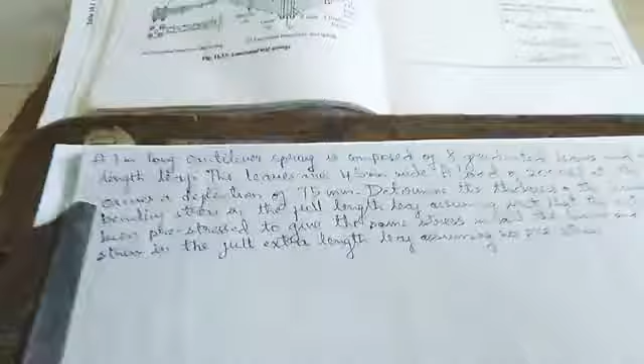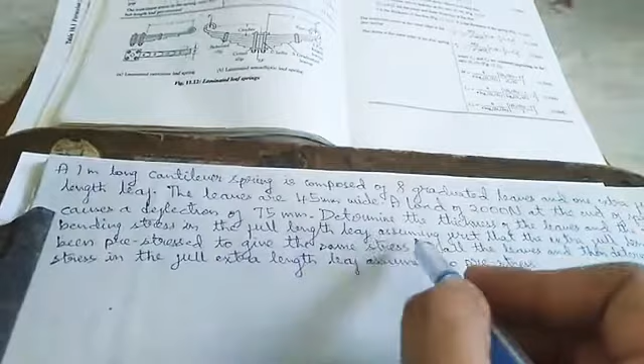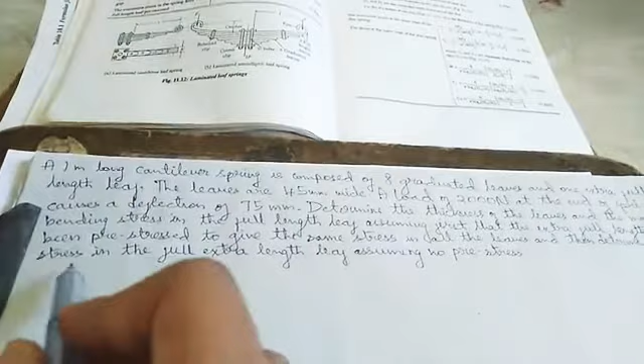A 1 meter long cantilever spring is composed of 8 graduated leaves and 1 extra full leaf length. The leaves are 45 mm wide. A load of 2000 Newton at the end of the spring causes a deflection of 75 mm. Determine the thickness of the leaves and the maximum bending stress in the full length leaf, assuming first that the extra full length has been pre-stressed to give the same stress in all the leaves, and then determine the stress in the full extra length leaf assuming no pre-stress.

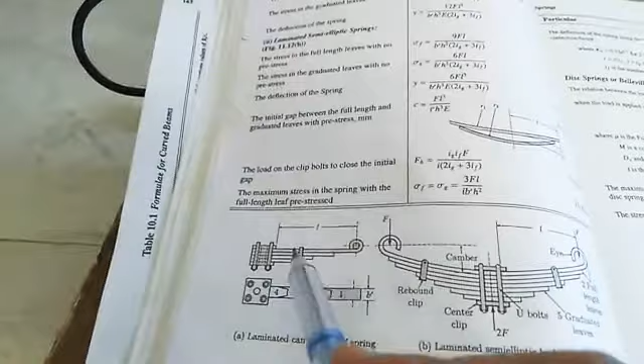So here they have given the cantilever spring. So this is the cantilever spring. They are saying it is composed of 8 graduated leaves and 1 extra full length leaf. So the topmost leaf is called the full length leaf and the remaining leaves are known as graduated leaves.

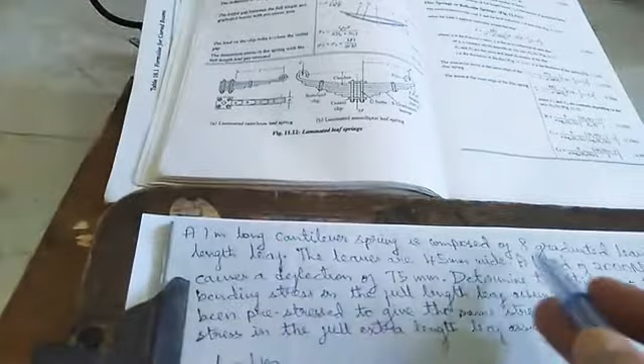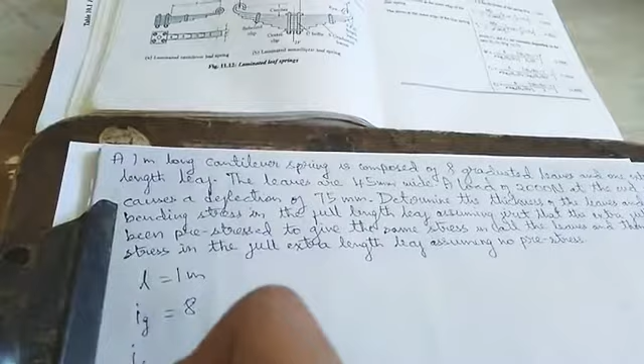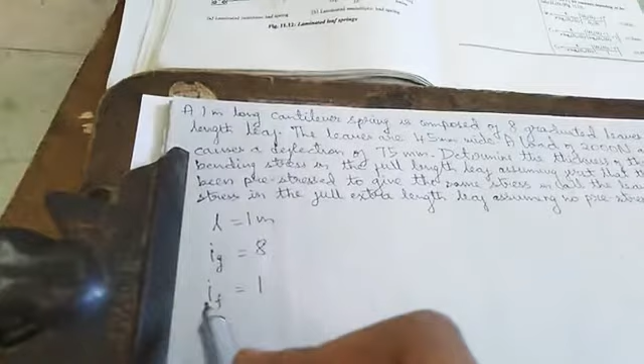So we shall take L is equal to 1 meter, as given 1 meter long. It's composed of 8 graduated leaves, so for graduated leaves we shall call IG. IG is equal to 8, and 1 extra full length leaf, IF is 1. Since they are given specifically 8 graduated leaves and 1 full length leaf, we have to take IG as 8 and IF as 1. So IG plus IF will be the total I.

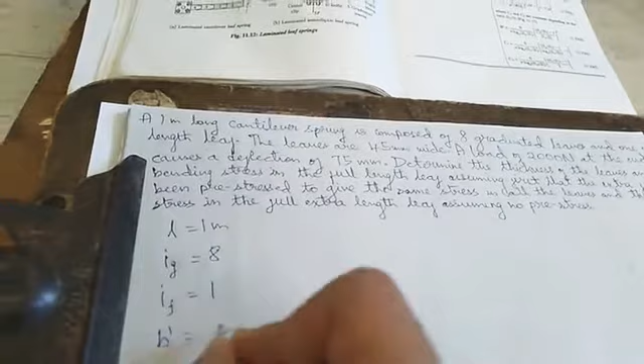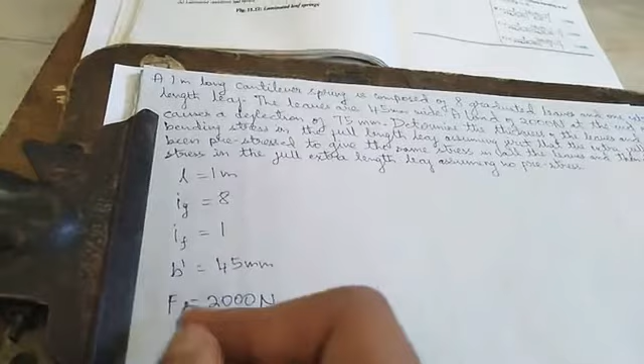The leaves are 45 mm wide, so width is B dash, 45 mm. A load of 2000 Newton, so F is equal to 2000 Newton, at the end of the spring causes a deflection, Y is equal to 75 mm.

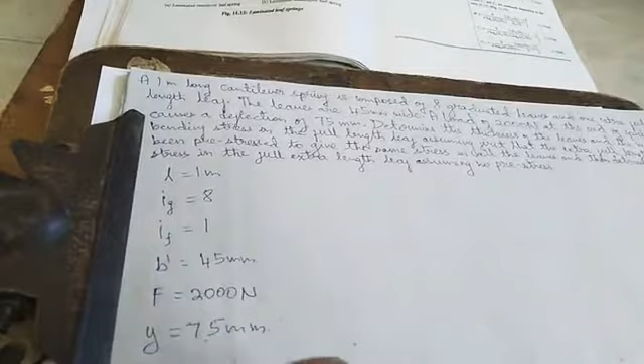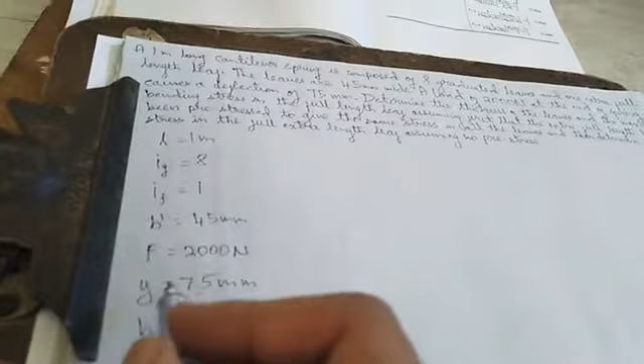Determine the thickness of leaves and maximum bending stress. So they are asking us to determine the thickness H and maximum bending stress. Here they are given two cases.

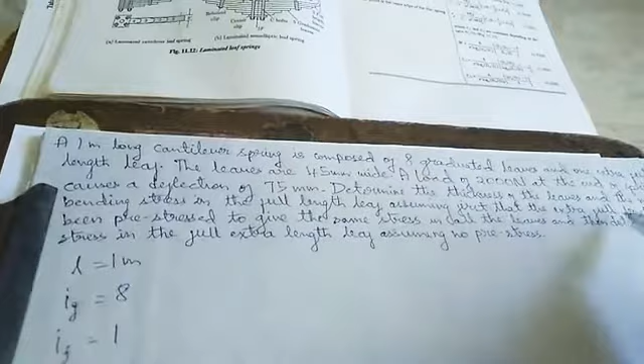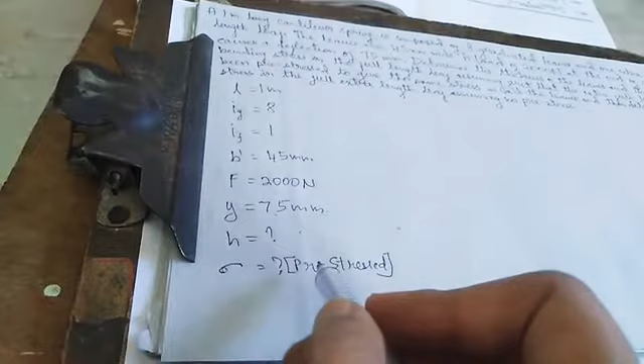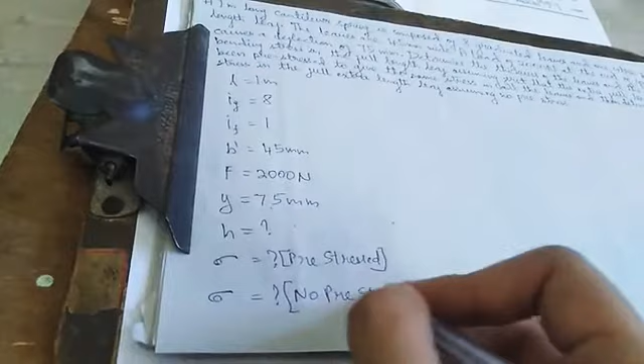Bending stress in full length leaf assuming first that the extra full length has been pre-stressed to give the same stress in all the leaves, and then determine the stress in the full extra length leaf assuming no pre-stress. So the first condition is we have to find the maximum bending stresses when the leaf is pre-stressed. Also we have to find out the bending stress when there is no pre-stress. So these two conditions are given. We shall see how to solve this problem now.

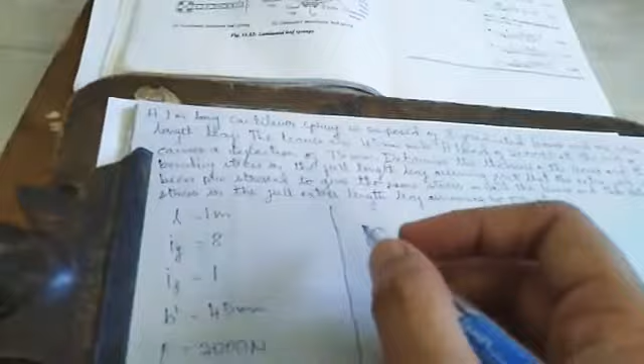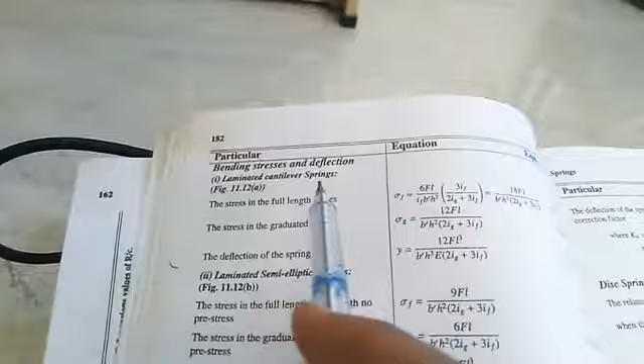First we shall consider the deflection. Data handbook page number 182 gives bending stress and deflection for laminated cantilever spring. Since in the question they are given a 1 m long cantilever spring, we have to consider the laminated cantilever spring from this area.

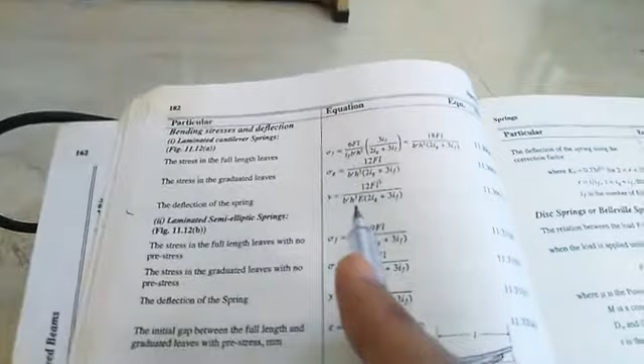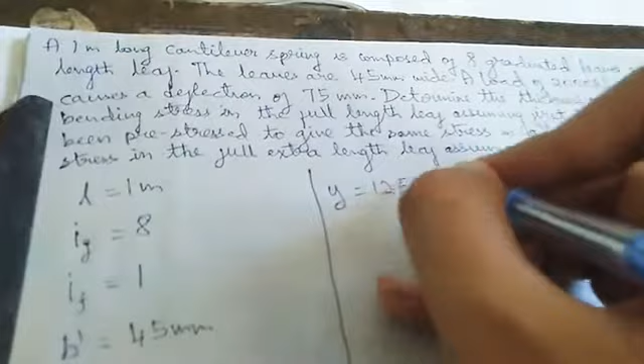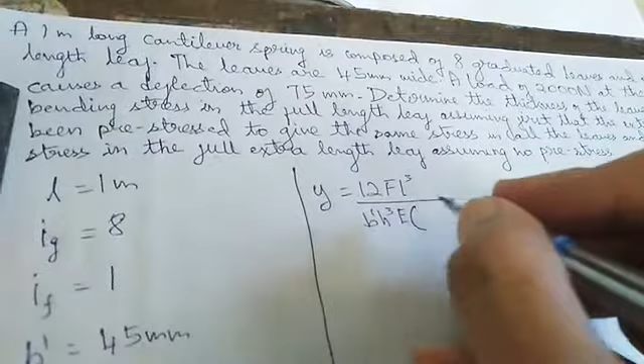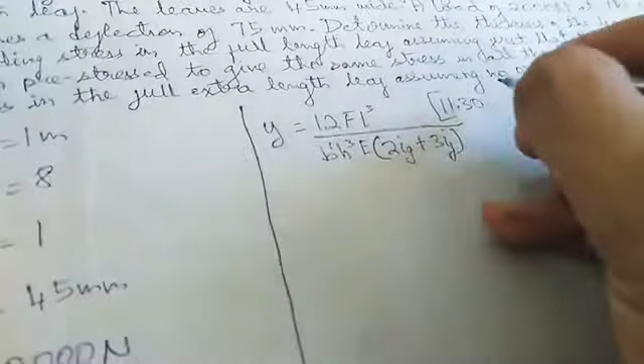We'll consider the deflection first. Deflection Y is equal to 12 FL cube, equation 11.30C, page number 182. Y is equal to 12 FL cube by B dash H cube E, 2IG plus 3IF, equation 11.30C, page number 182.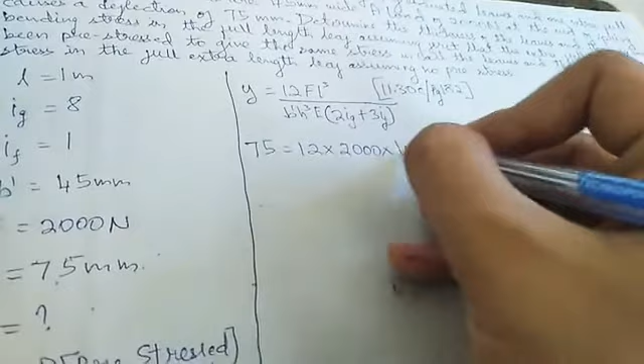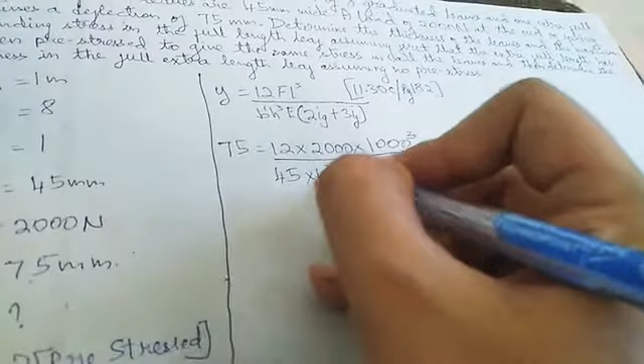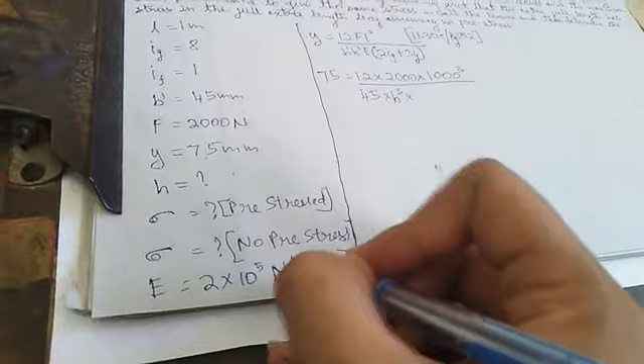In the question they are given the deflection as 75 mm, F as 2000 Newton, L as 1 meter or 1000 mm, B dash as 45. H cube we have to find out, and E is not given, so we shall assume E as 2 into 10 power 5 Newton per mm square, or 200 GPa. Since it's not given in the question, we shall assume this.

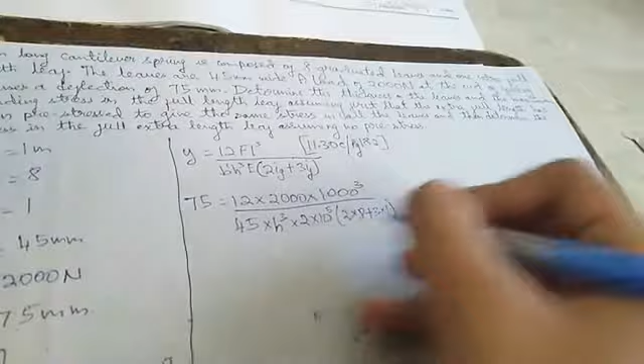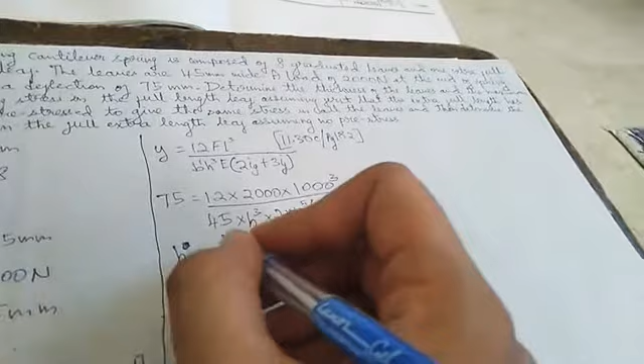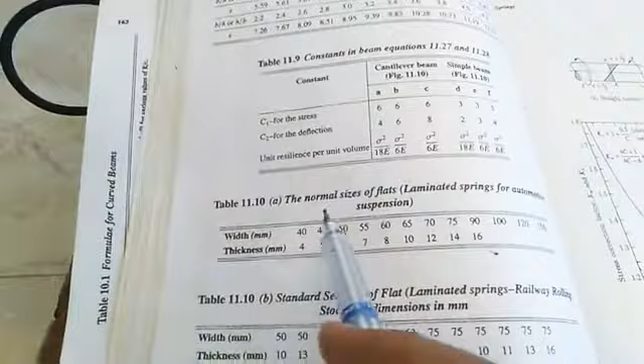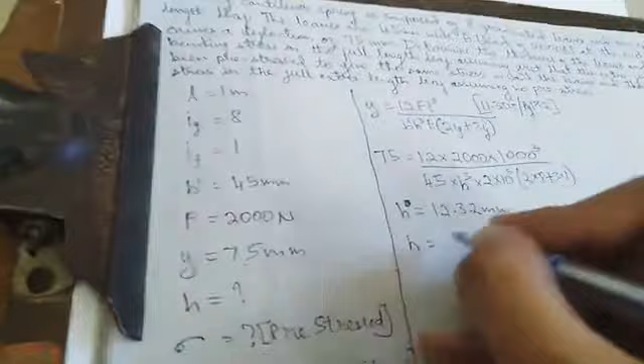From page number 198, table 11.10a, the normal size of flats. So for thickness, here they are given the standard size. In the problem we have got 12.32 mm, so we shall consider the next higher value, 14 mm, as the thickness, from table 11.10a, page number 198.

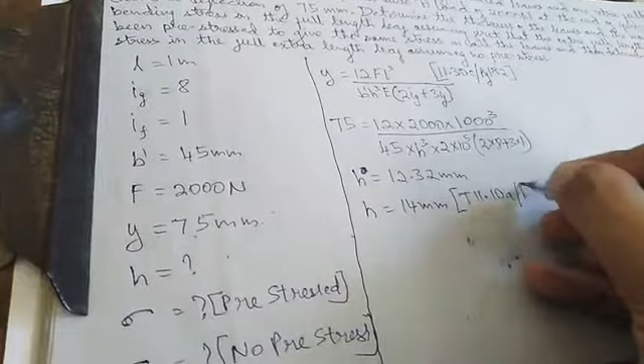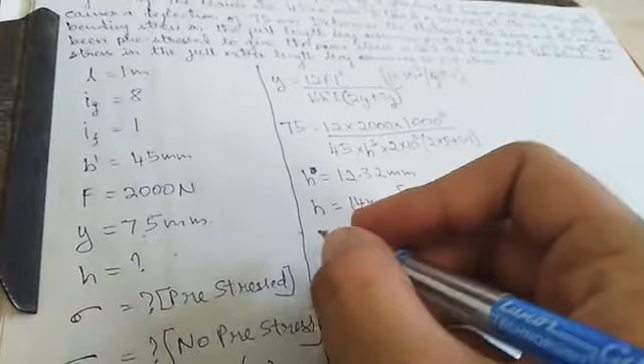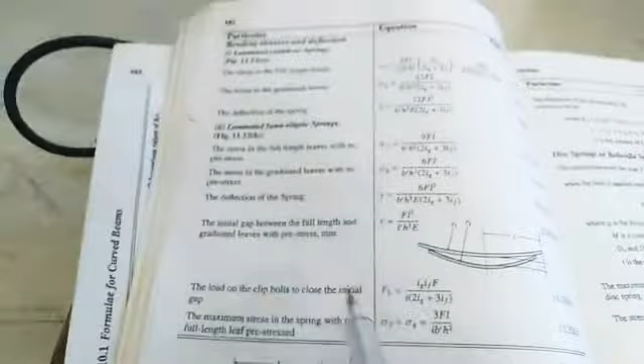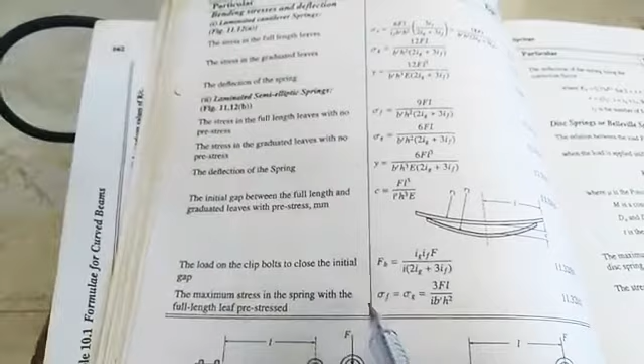Next we will find the stress in the full length leaf when the leaf is pre-stressed. We shall take this from the data handbook, page number 182. Here they have given the condition for maximum stress in the spring with the full length leaf pre-stressed. So if it is pre-stressed, the stress sigma F is equal to sigma G, that is, stress in the full length leaf spring is equal to the stress in the graduated leaf springs.

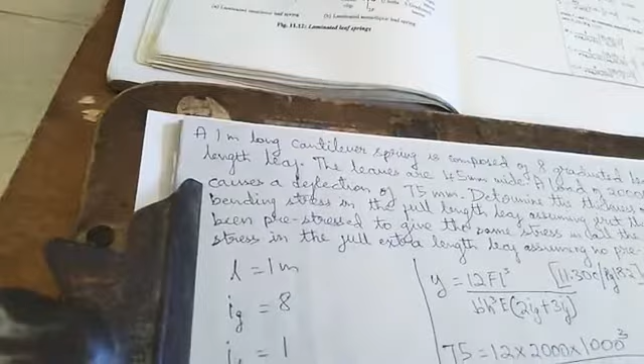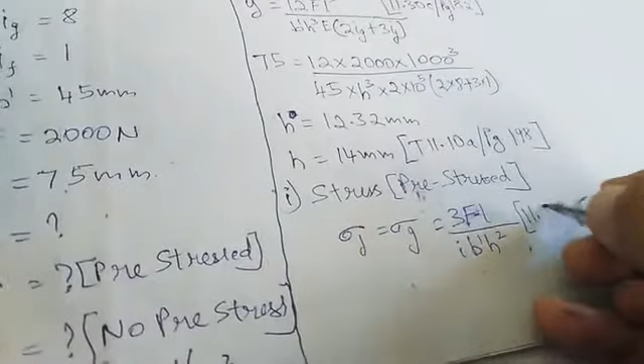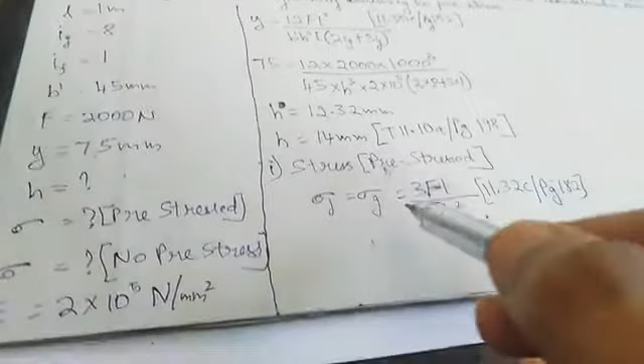So sigma F is equal to sigma G is equal to 3FL by I B dash H square, equation 11.32C, page number 182. We shall consider this equation: sigma F is equal to sigma G is equal to 3FL by IB dash H square.

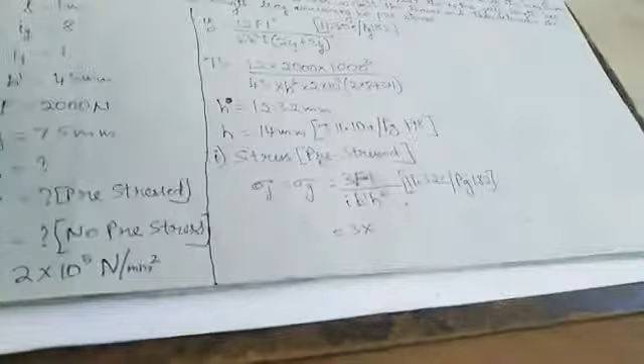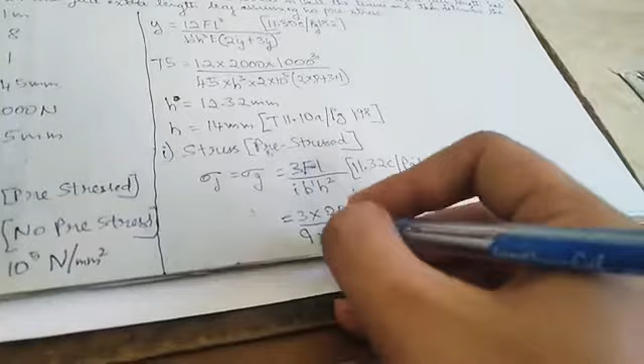So when the condition is pre-stressed, they have given 3 into F, 2000, into L, 1 meter or 1000 mm. I becomes 9 because we have added the graduated and full length leaf springs. B dash is 45 and H is 14 square. So the stress becomes 75.59.

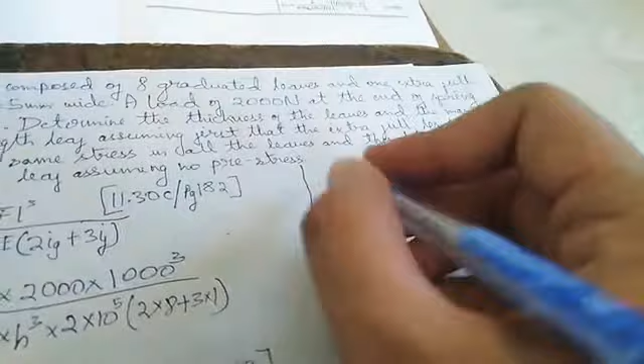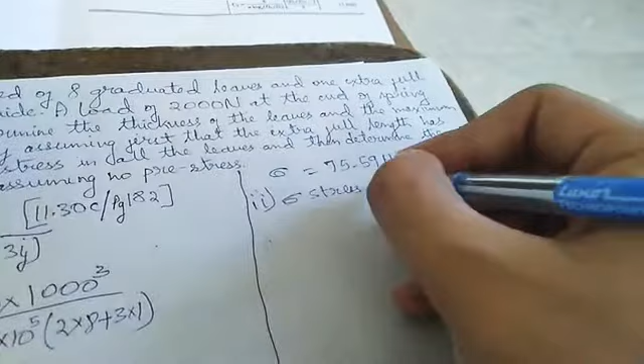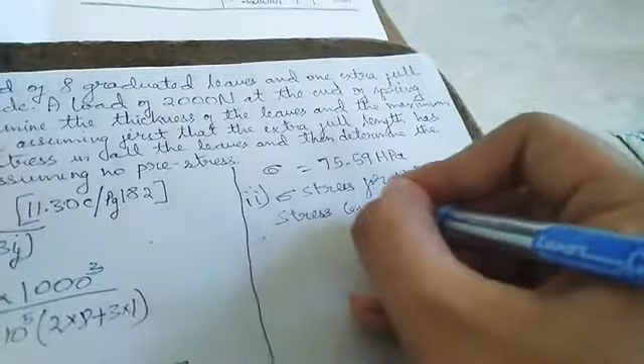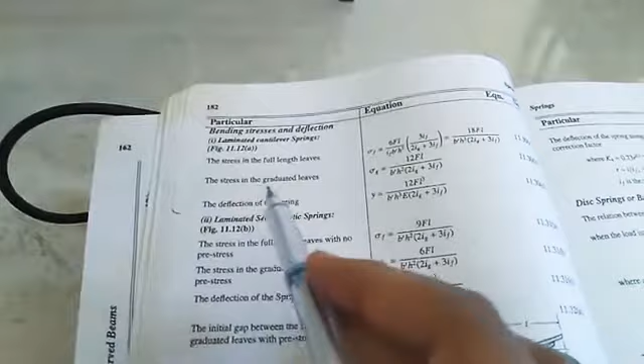So this is the stress when the leaf springs are pre-stressed. Now we shall find out the stress for the not pre-stress condition. From the data handbook, laminated cantilever springs, the stress in full length leaves and the stress in graduated leaves. We shall consider the stress in full length leaves, sigma F is equal to 18FL by B dash H square into 2IG plus 3IF.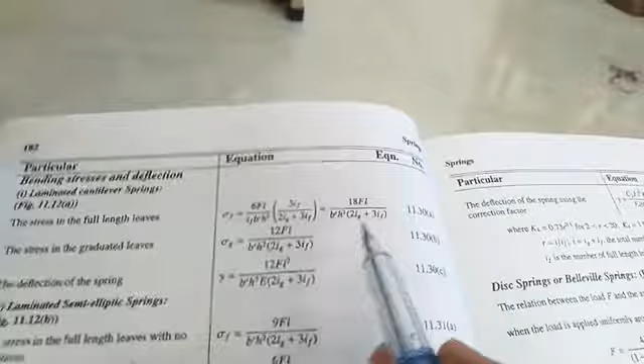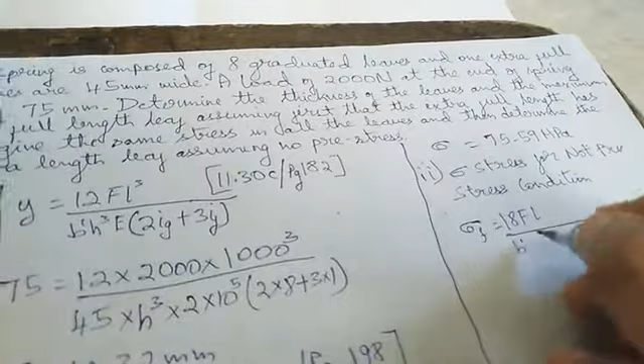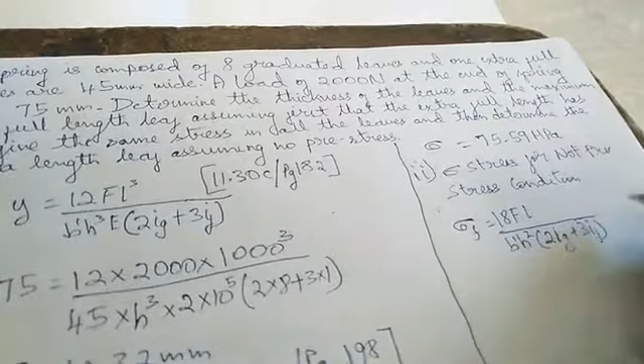We shall consider this equation: sigma f is equal to 18 FL by B dash H square, 2IG plus 3IF, equation 11.30A, page number 182.

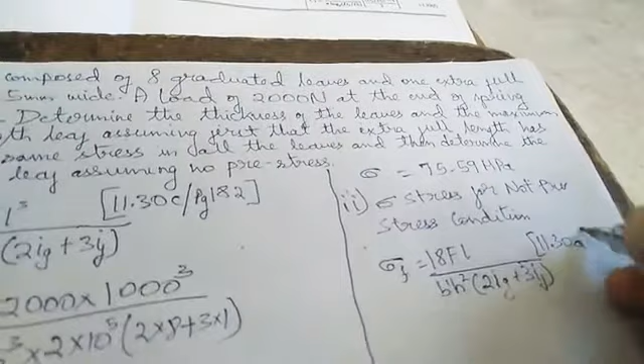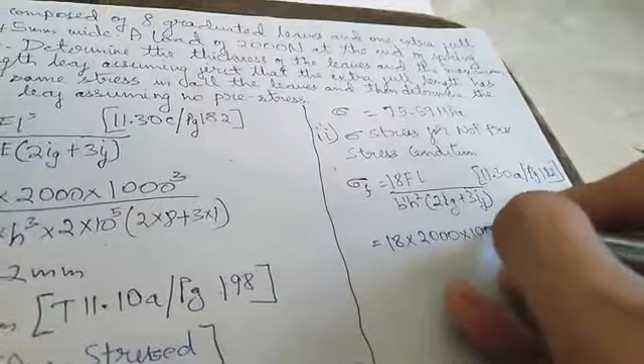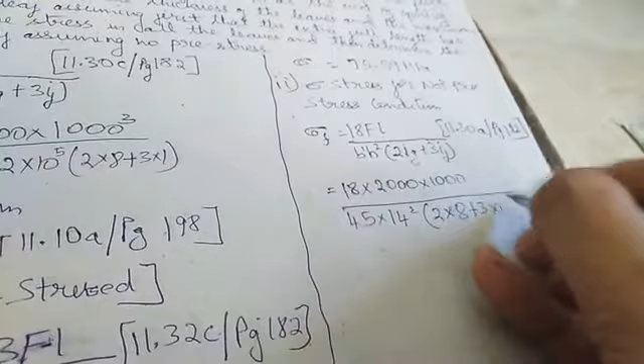So we shall find out 18 into F, 2000, L is 1000, B dash 45, H square is 14 square, into 2 into 8 plus 3 into 1. Sigma f we will get by solving this equation is 214.82 MPa.

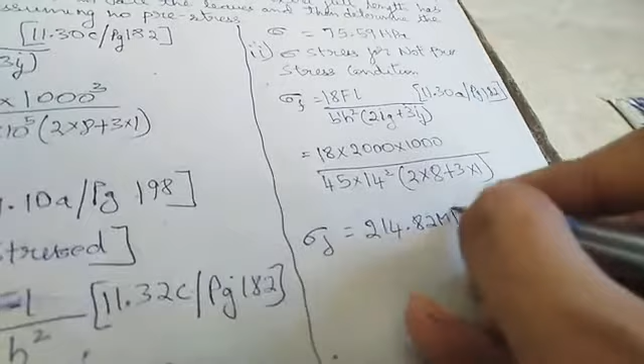So in the question they had asked us to find the stress for both conditions: one condition is pre-stressed and another condition is not pre-stressed. So we have found out the bending stresses for both the conditions.